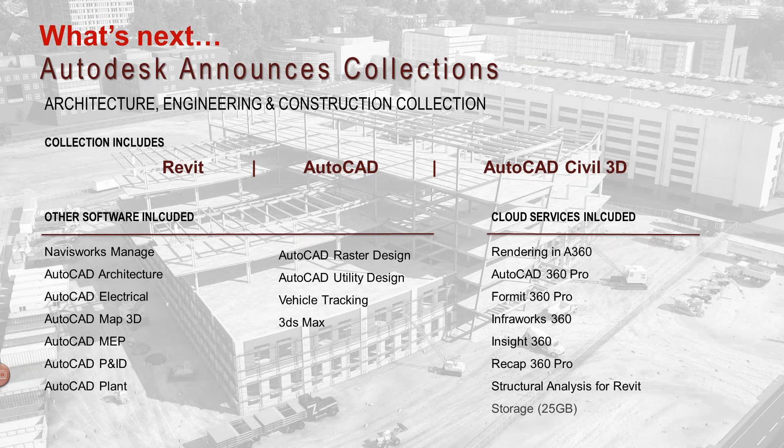Now let's go ahead and get to what you guys are all here for. So what is new in Autodesk Revit 2017? As you guys can see, for each discipline, architecture, structural engineering, and mechanical, electrical, and plumbing, there has been quite a few features and enhancements that Autodesk has made with this new version of Revit. Some of the ones that we feel are the strongest, both Curt and myself, just based on previous conversations and interactions with our customers, is on the architectural side, there's depth cueing...

...global parameter enhancements, as well as a text editor and layout engine. I know that a lot of you that I see on this webinar have asked about a text editor, and know that that's been something that Autodesk has been missing for quite some time, and now they have come out with it for Revit 2017.

On the structural side, there's reinforcement connectors, structural connectivity, and steel connections for Revit. So quite a few good things that they've come out with on the structural side.

And then on the MEP side, there's design to fabrication, hanger improvements, and creating an MEP model within Revit with fabrication components. So Autodesk has really made an effort to have the connectability between Revit and fabrication and increasing the workflow between those two.

It's really not supposed to be the building that is the focus of this construction document or this presentation. Instead, it's about the building in the foreground. We've gotten around it in a couple ways in the past by picking on elements and then telling that one element to be halftone in that view. I decided to throw in this slide right here because I think this tells the story even better.

Let me demonstrate that for you here. Let me flip over to the Revit 2017 screen. I know there's a little bit of a lag, so I'll try not to talk too far ahead of what's going on. So let's start in the plan view here.

It's this elevation marker right here. I'm going to pick on it, and you can see that the range of it goes back down here to the bottom part of my screen right here.

So one thing you'll want—I'll do just a little how-to on a couple of these demonstrations, but mostly I'll try to keep this high level. You can take a class from me later and I'll teach you how to do these things myself. But the far clipping, instead of no clip, that's not going to work with depth cueing—clip with line or without line is what we're looking for there.

And I get two sliders that I'm going to use here in a minute that run from here down to here. So for example, if you look in this area right here, from the top to the bottom down here might be considered 100%. So right about here might be 15%. If I move one of the sliders to 15%, it's going to start cutting into the building in front of me. If I pick another vantage point about here, these walls start to fade away differently than the wall here in front that I'm seeing from this angle. This is about maybe 60% across my screen. Somewhere in there you'll start to see the hazing.

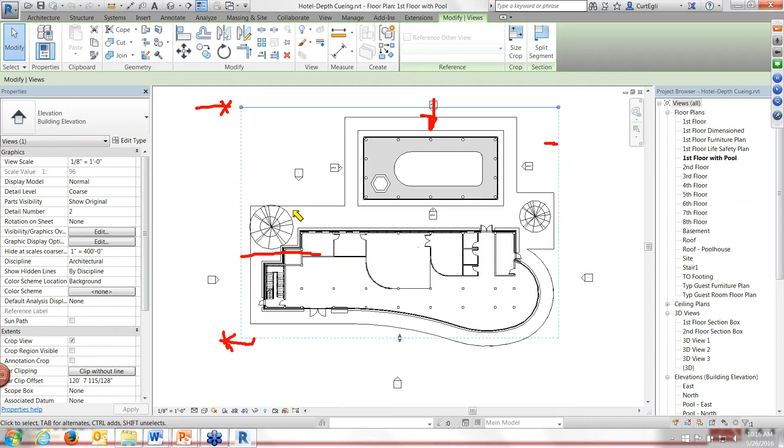Okay, that will happen. So let me go give that a try then. I'm going to go to that north elevation view, and I'm looking at the pool here in the foreground. The pool building is supposed to be the item of interest as I'm looking at that, and I'm trying to get the hotel to go to the background here. So what I've done in the past probably is pick on this and say I'd like to override the graphics of these elements and tell it to be half-toned, something like that.

The depth cueing will help us with this. So the new buttons that you're going to find in Revit are down here under graphic display options, and shadows will work really well with this too. If you turn on shadows, you're going to see some of the depth cueing happen with shadows as well. Here's the new area for depth cueing. It works in section and elevation. It doesn't work in a plan—that doesn't even make sense there, right? But it does in this sort of view.

For MEP and structure, I was saying earlier that we have some automated behavior out of our templates that we use there. Shift your view over to coordination or architectural in nature, and then this button will work for you in that view as well if you'd like to have pipe and duct in the foreground, or structure, that sort of thing, and have something else haze like what we're going to do here.

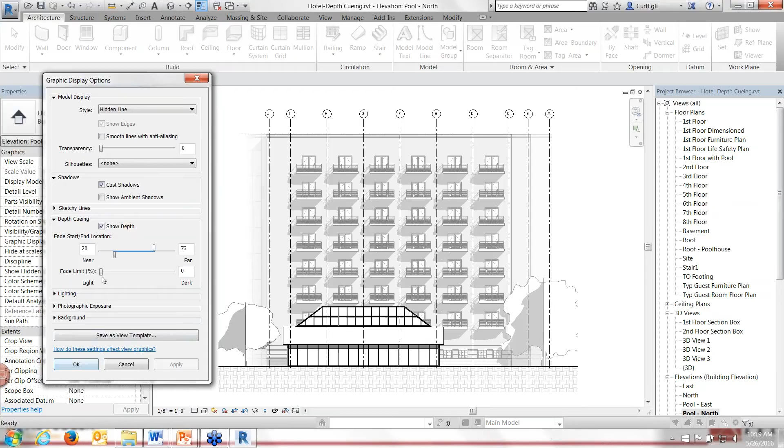I'll hit apply. And then for the fade limit, maybe I up that just a little bit—when it finally hits its limit and starts to fade out, how light or dark do I want that to be? So if I set it up too far, it gets dark. If I set it up at this end, it'll stay a little bit lighter.

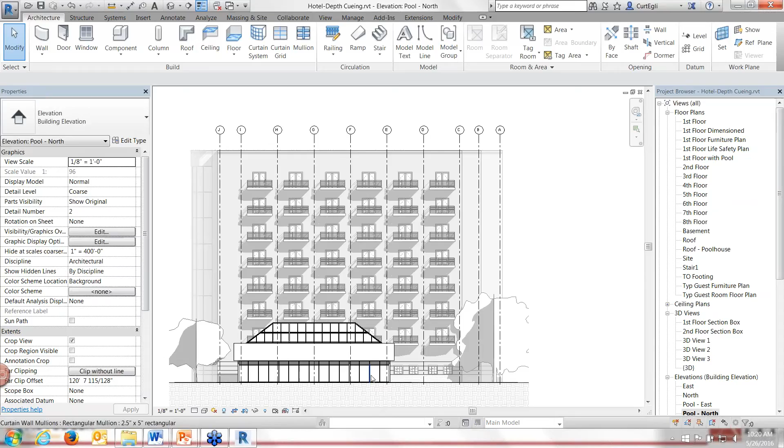And what I'm heading for here is, you can see right away that the building in the foreground is jumping right out at us. In the more subtle ones, like up here, you should be able to see that on your screen—this surface looks a little farther back than this one, which looks a little farther back than that one. So I can adjust that with those sliders.

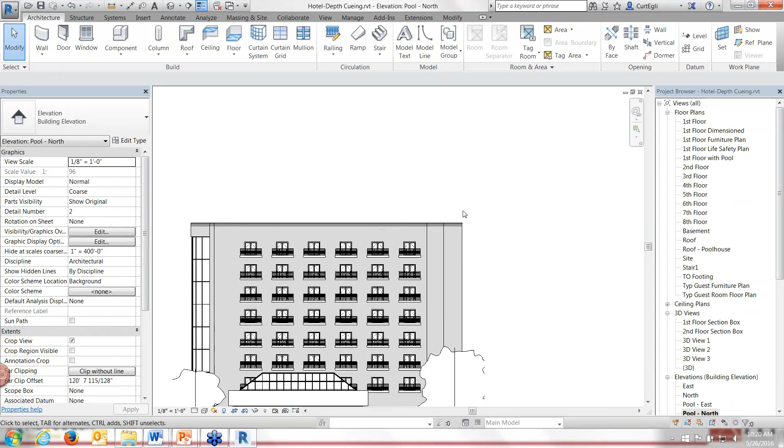You will note, though, that the annotative objects such as the grid here are not affected by depth cueing, so they will stay bold—which is perhaps what you want in a construction document. But I typed in VH to hide that category, so it's that sort of thing you may just want to shut off if that's what you're after. Okay, so anyway, that's depth cueing.

Let me go back to my slides.

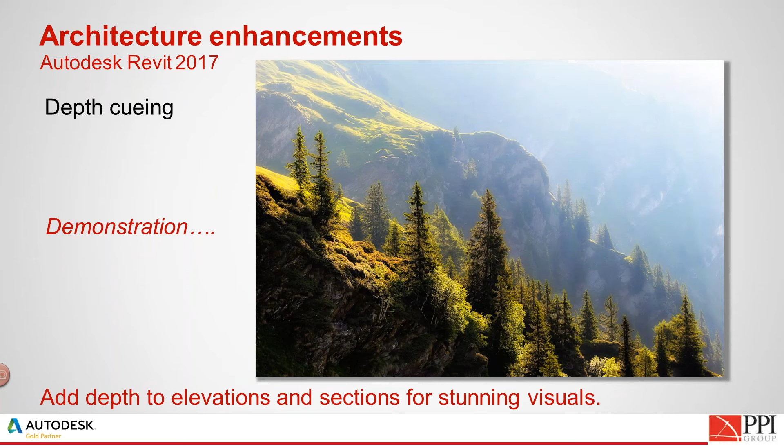I double-checked this because I was kind of hoping it was a misprint. I know this is important with walls, roofs, and floors - it'll make it easier with things throughout the building. I was kind of hoping they would include topo surfaces in this as well.

With some of my outside applications, I'll want to have a fence or railing follow up the hill, and it still does not do that. I would either place a shaped wall underneath it and have that slightly hidden under the surface, or - somebody on the internet was showing a really great application in Dynamo to get that part done.

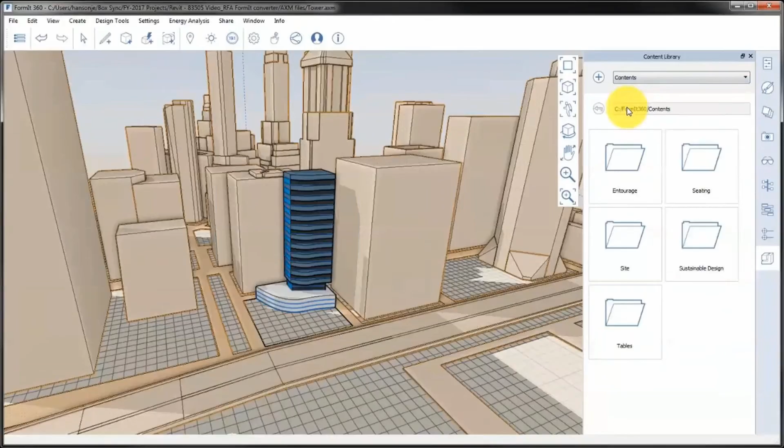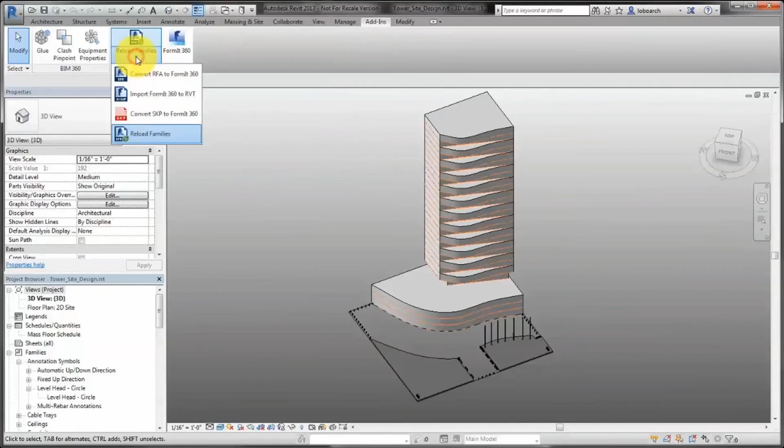FormIt is for conceptual modeling. FormIt 360 is a service - it's not included with Revit. They've bridged the gap between the two, so that this architectural modeling software where you'd sketch and collaborate and revise early design concepts - the converter will let you take Revit RFAs, a short list of RFAs, and bring them into FormIt. Then if you've changed things, you can replace all and override as you're bringing them back in.

The categories that can be transferred back and forth - if this goes too fast, you can look it up on the internet later - but it's casework, entourage, furniture, furniture systems, parking, site, mass, which would be a good one, generic models, that's pretty broad so that could be across disciplines, and specialty equipment. So it's a little bit of an odd list of what they concentrated on for the conversion, but not too odd.

When you think about what you might be using FormIt for in a conceptual model, those kinds of categories like entourage, parking, site, and so on are all things you probably would want to include, and now you don't have to remodel them to get them in there.

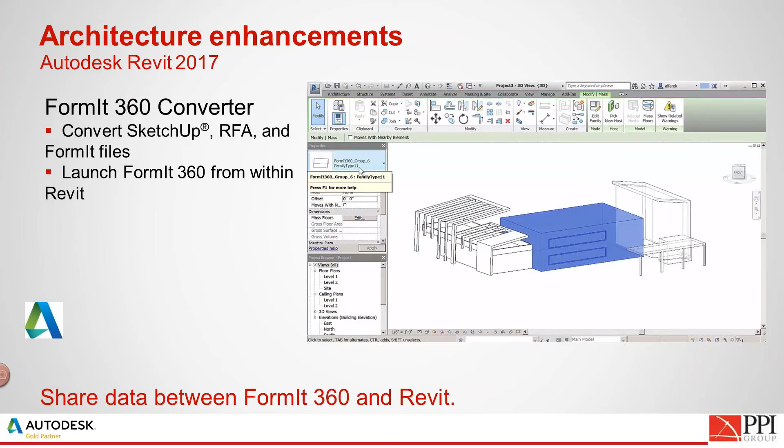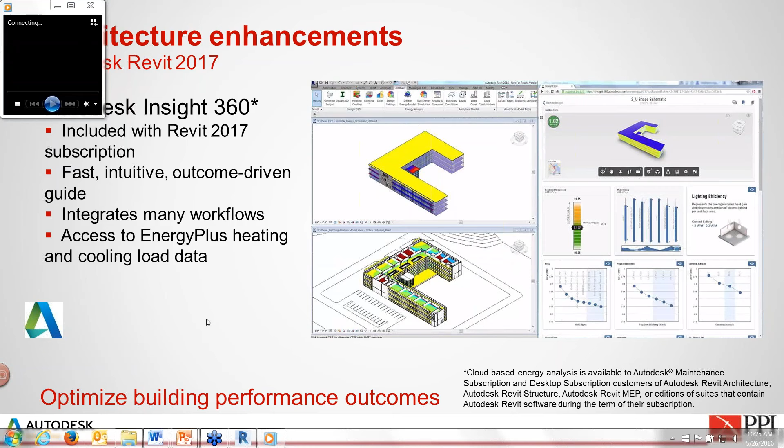Another one included in this presentation that revolves around cloud services as well is Autodesk Insight 360. This is one where you're using your Revit model and then looking for a guide basically on how you can change your building in order to make it perform better. I included a video on that one as well so we can make some fast rounds on it - an outcome-driven guide to building energy and environment performance.

You'll pick your geographic location, so you're at least going to want to do that, obviously. And then Revit has an automatic energy analytical model that we'll use to enable Insight 360 to be able to give us results back like this.

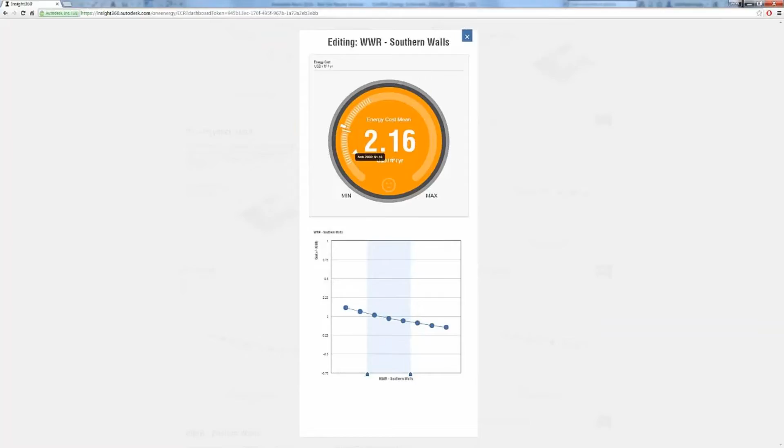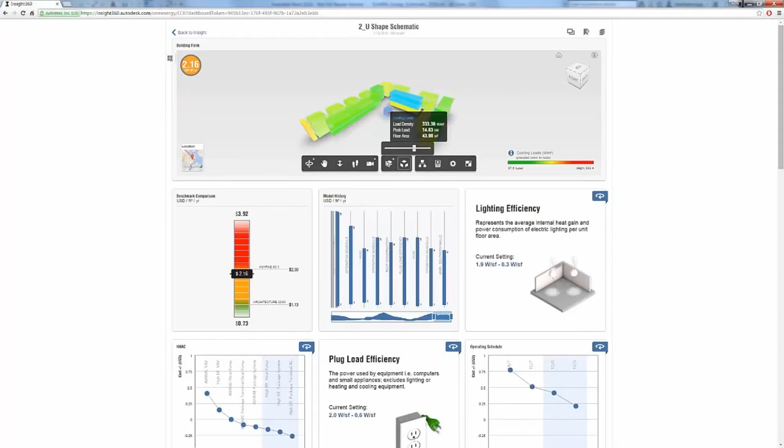So we look at a range of potential design outcomes. They have an energy cost range factor built into this to identify key energy performance drivers and compare different design scenarios. So that's a lot of what this is about, trying to make that better performing building.

It integrates a variety of simulation engines and workflows, such as Revit energy analysis, which you're maybe familiar with, and lighting analysis as well. There's access to EnergyPlus heating and cooling load data, and that's also included in Insight 360. So once again, it's to provide a guide so that you can make better decisions with regard to building energy and environmental performance.

So another one that is going to be across multiple disciplines as well here is global parameters. And I thought I would demonstrate that one for you as well.

We can associate global parameters with type properties for an element, and with instance or type project parameters as well. Another way you can use this, keep in mind, is you can filter a schedule by global parameters if you so desire, to look for ones that are missing an association, for example. Also, you can transfer those global parameters between projects.

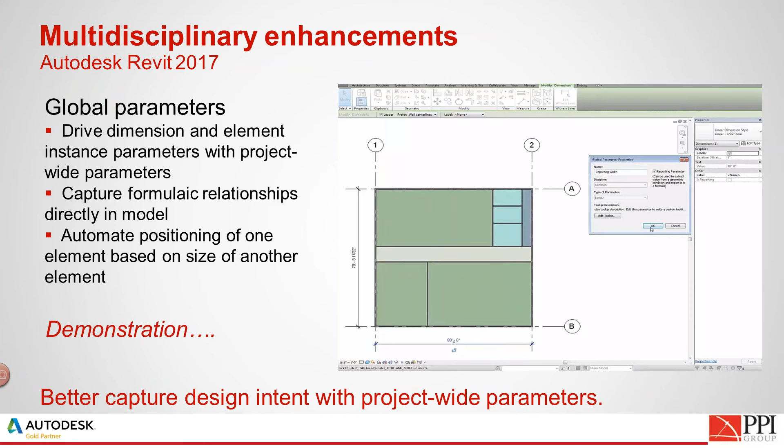So let me go ahead and give this a shot for you. Let me close out of this project and open up a different one. Let's go to this one here.

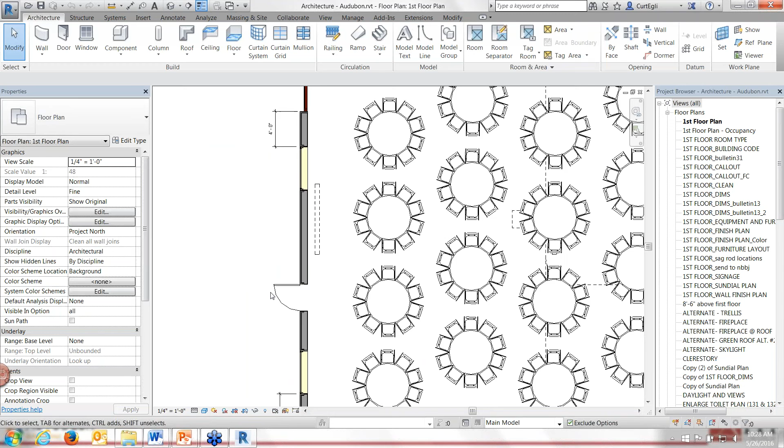So I have a global parameter that's already set up in this one that I thought would be a good example. Down here at this end of the building, I've got two different windows set up. This one is 4 foot off of the edge of the building, and this one at the moment is some odd distance. So if I select this window and say I want it to be 5 foot, that's just a plain dimension I had driven on that one.

Up here at this end, if you look at what I had done, when I select on it you'll see a little pencil that shows up next to it, showing there's a global parameter that's been placed on it. And if you look up here at the top, you'll see the window distance has been defined.

And so the way that you set up global parameters, maybe I'll just draw a couple of walls out here. Say that I draw a wall here to here, and another wall from here to here, and another wall from there to there. I'm just drawing a few here.

The way that you set up a global parameter, it's this new button that showed up in 2016 R2, about midstream. I can say that I want to create a new one called, here that's new, this is new. I'm going to call this one L, for example. And I'm going to create another one called L2.

But this time, instead of just setting these dimensions like you saw the 4 foot revolve back down to this, you can set up formulas around these as well. So for example, if I wanted L to be L2 divided by 2, always half that distance: if this one is 8 foot, that one automatically shifts to 4. If this one is 10 foot, that one automatically shifts to 5.

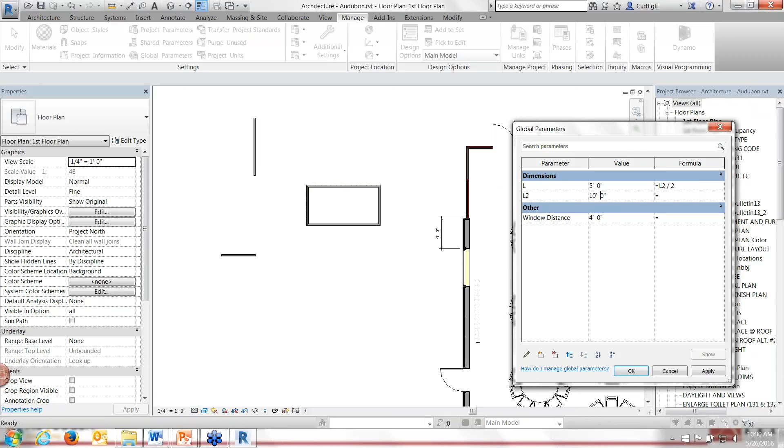And so if I assign those, for example, where I say... so if I put it here, okay, so here we go. Say that I put a dimension on this side and a dimension on this side. I'm just making permanent dimensions out here. Maybe I'll do it this way for you. This will go fast. So here's some dimensions.

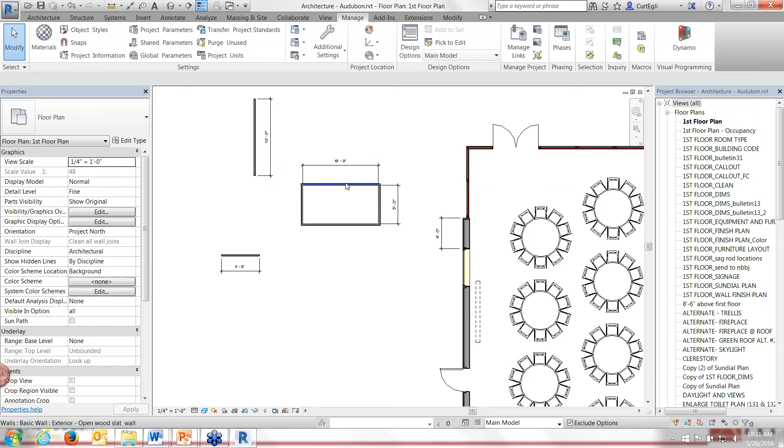I select on one of these and say, you know what, I'd like you to be L2, and it goes to 10 foot. This one, I'd like you to have a global parameter on you called L, and it goes to 5 foot. And then in a totally different part of the building, I say you be L2, and you down here be L.

Now at any point, if I say, let me get in a little closer so you can see this better, if I say I really would like you to be 8 foot—now watch what happens: this one becomes 8, that one will be 8, this will be 4, this will be 4. And I say okay, everything shifts. So the way that can work, there's just so many different uses for this. I'm going to do the same thing with this window.

If I want to keep these two windows equidistant from the edge of the building, I select on this one and assign that to the window distance parameter that I had created. Now it's 4 foot, right? I'll edit that and make it 6 feet and apply it. So say it's a multi-story building like a hotel, and those windows on the outside edges always stay equidistant. Pretty cool, huh? Very cool. Well, thank you, Wendy.

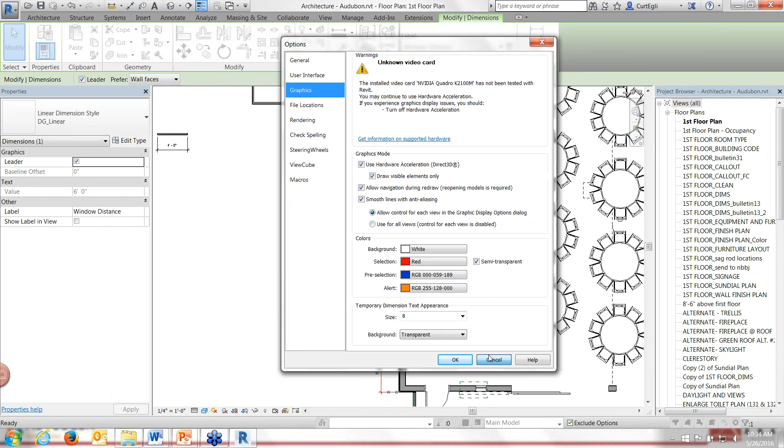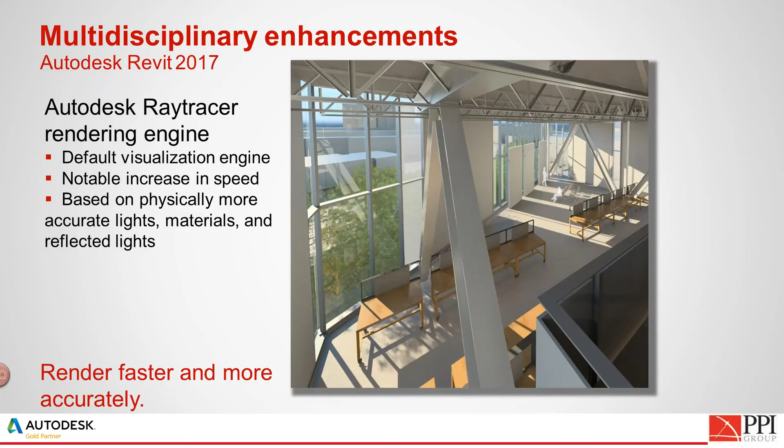Okay, let's come back to this again. Another one, I won't take the time to do a full rendering, but for those of you that want the marketing material or photorealistic renderings, Autodesk now has the default visualization engine in Revit as the Autodesk Raytracer. Two aspects are going to be picked up: there's a notable speed increase that will improve performance, and physically based rendering results are going to be more accurate - we're talking about reflections and subtle lighting enhancements.

Let me show you a little bit about the text editor here. Maybe this is another thing that affects everybody - you've been waiting around for this a while. Let me demonstrate this for you. I'll close this out, and let me open up this one.

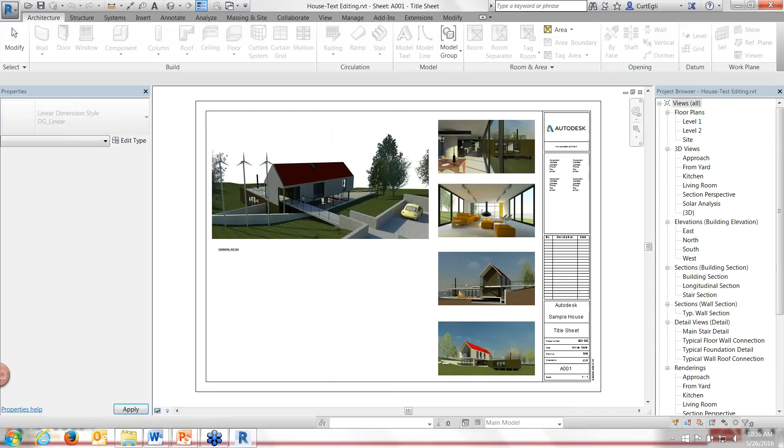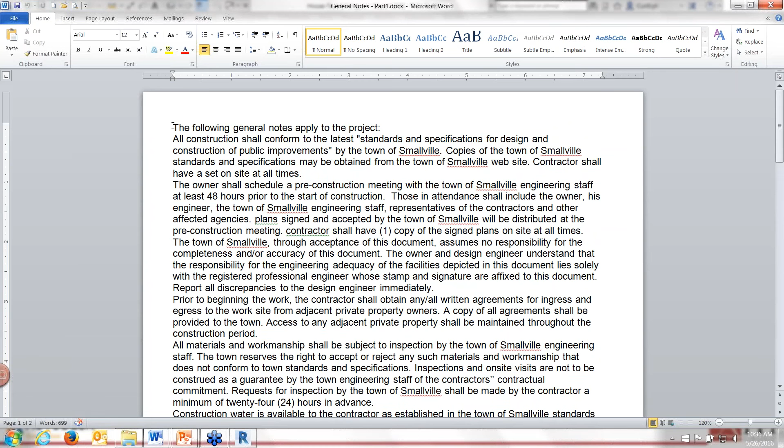Without watching me do a ton of typing, let me take a Word document I have, General Notes Part 1, so I want to have this text here. I'll do a copy on that and then paste it into Revit. I start up Annotate, go to Text, that's a good size, say I want it here-ish, and then do a paste. Okay, so now I've got a bunch of text in my session.

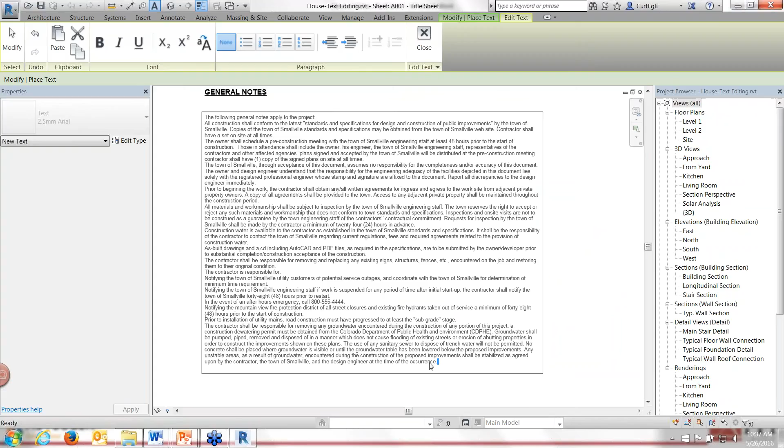The controls are very similar to what you have now in the text editor, so you can resize it like you're seeing here. But if you click on it once more, you'll see the new capability kick in. It gets darker instead of blue, and I can say up to here I'd like to have it a numbered list, right? The way this works with the soft returns - do you see how this is numbered down? I'm going to be using Shift Enter here on the ends of these. Let's do this one too. Give me a second on this.

Shift Enter, Shift Enter. Where's the end of my sentence? There, Shift Enter.

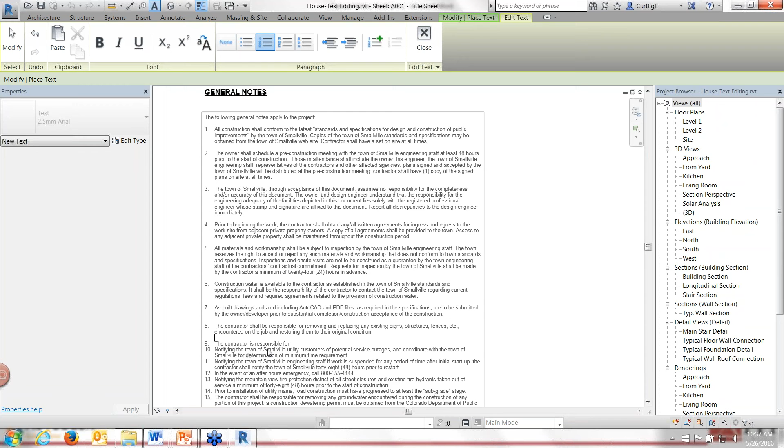Okay, now right in here, for example, I'm saying, ooh, you know what? I'd actually like these to be sub-bullets. So let me highlight from these and indent those, and it becomes A, B, C, D, E, kind of a thing. Nice, huh? So Shift Enter there, that sort of thing.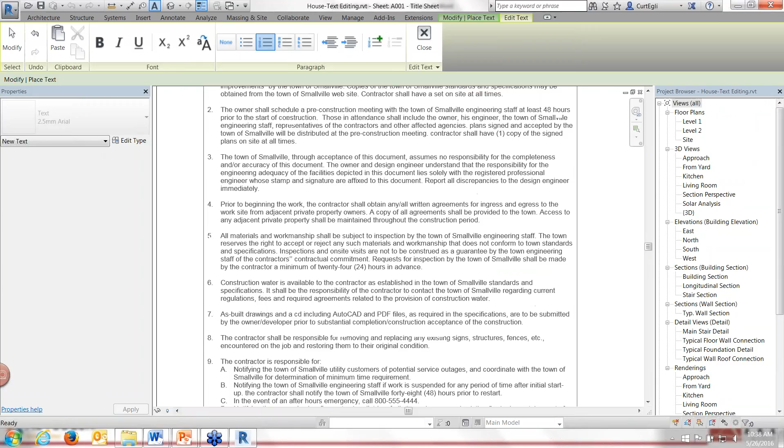And then I guess as you'd expect, at least would figure that they'd put bold in there, for example, like that.

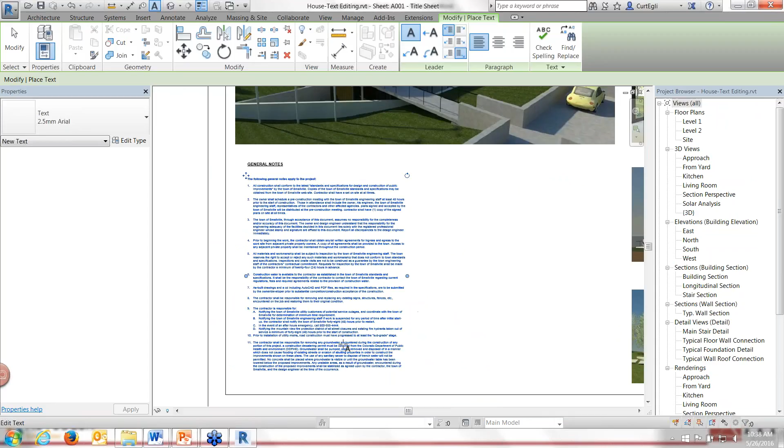Okay, so say that there's another circumstance. Well, let's finish this off too. It's mixed case right now. Let's shift this over to uppercase. Yeah, so you can shift it back and forth between the two with this button right there.

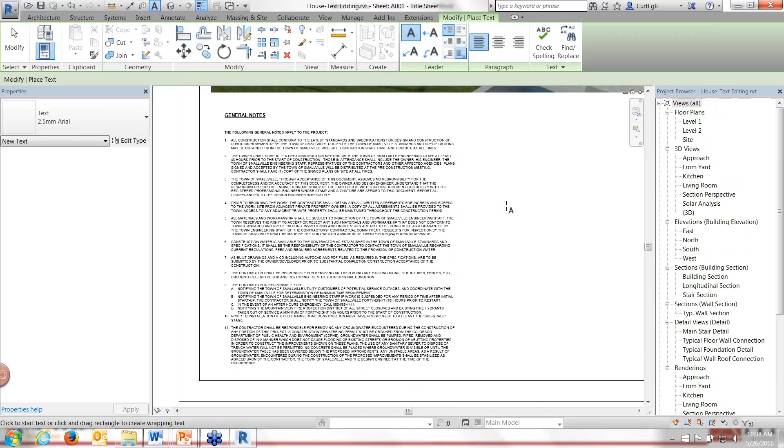Nice. Okay, so to kind of complete this part out, over here in this area, let me resize that just a bit. I have even more notes I wanted to put on here, but I'm going to want another one over here that starts with 12. So I'm going to come to a second document of general notes.

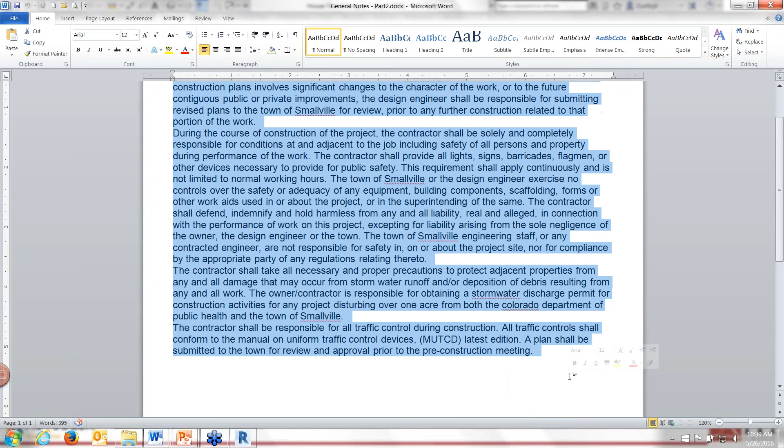So I'm going to take this from here to here and copy, and then I'll start up my text again here in line with that. Let's do it about here-ish, and paste, and highlight, and say I want to number it.

Wow, that got really long. I should have done a box. Here, I'll get it out here. Come on in. All right, there we go.

Now that one starts out as 1, so I click, whoops, cancel. Click on it once again, click again.

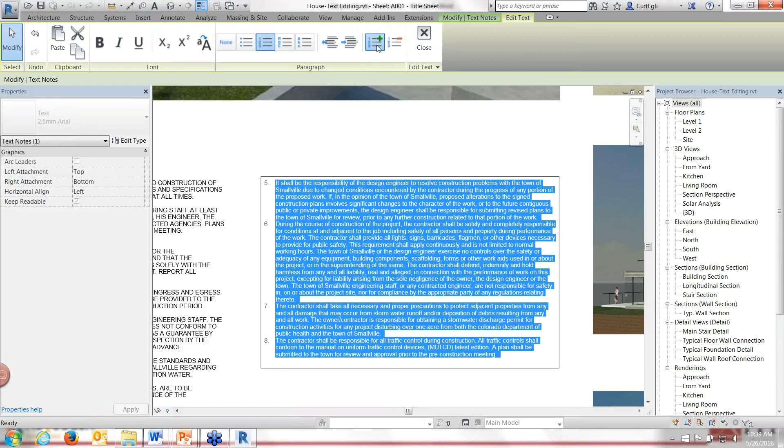That starts out with a 1, so I'm going to say that I'd actually like this to increment up to 12. So I'm just hitting this button up at the top to increment it up to 12. And then you do the soft returns, and maybe I'll just do this before leaving it. Change it to uppercase as well. Okay, that's the new text improvements in here as well.

So keeping my eye on the time, let's go back to the slides.

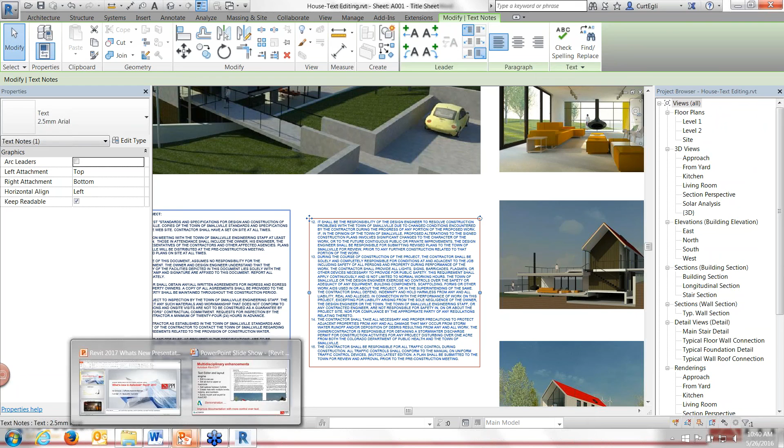So schedule improvements, a couple different things here. They now have included view templates as a part of this for multidisciplinary enhancement. This way, if you have multiple schedules, you can keep them all looking uniform.

So I use that. There's calculations with annotation tags. I think what I'll do is I'm going to set this one to the side because it takes me a few minutes to do this, and I'll come back to it if I have time. I want to make sure I don't shortchange some of the others.

Two different things going on here. A tag can now use a calculated value. If I get time, I'll show you how I can have it look at a parameter, a value, like how many students is allowed within that room, or should be allowed within that room. And then as the square footage on the room changes, the tag will keep changing with 23 students, and so forth.

And the other thing that maybe is an irritant that you're going to probably appreciate with tags is that now you can pin them. So you can pin them so that if, say, you're doing a door tag with a leader off of it, the door moves, but the tag will stay in place and the leader will just shift with it. It's also been an irritant in the past when you would go to free-end and the tag would jump to some new location. It doesn't do that anymore.

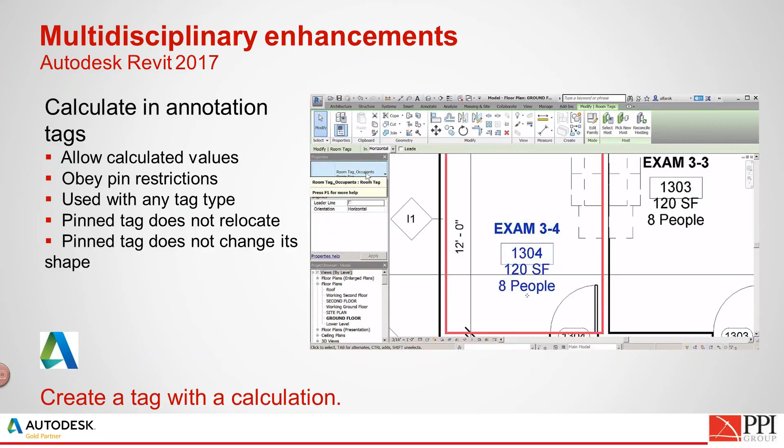Dynamo is now integrated into Revit. Before it was an add-on. Now when you do the install, you'll see the Dynamo button is built right in.

The idea behind this is to give access to non-programmers and programmers, to be able to use nodes that somebody else had created and make it do magical stuff for you. It's pretty interesting if you haven't used it before. I did that in a different presentation a little while ago, so I won't do that.

Tangency locks, what we're talking about there, I'll play a short video on that one.

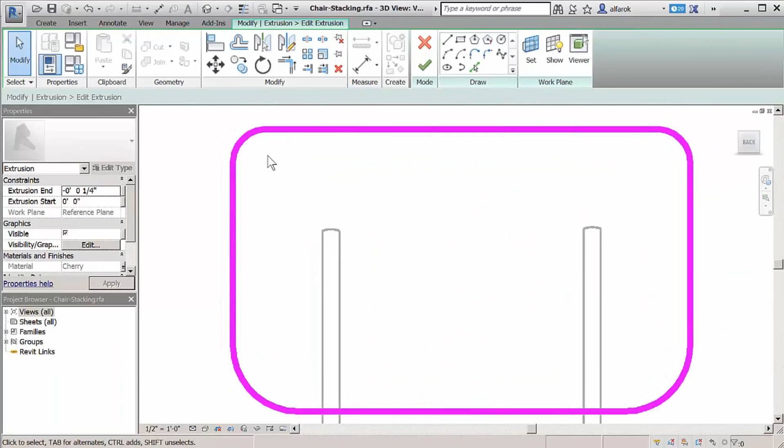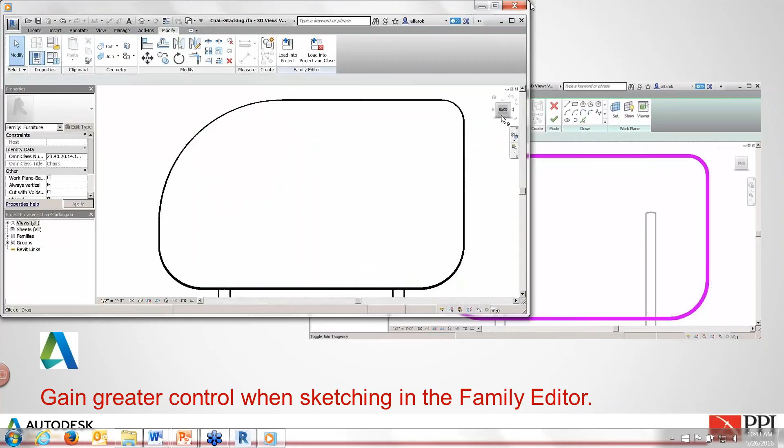For example, this could be on a floor or a roof when you're editing like that. The example shown here is in the family editor with the back of this chair. You can lock the tangency between that arc and the other two lines associated with it. Then it just becomes like clay - as you move it around, it flexes while keeping that association. So that's what we're looking for there, and that could be across all disciplines as well.

For structural engineers, let me drill down a little bit into a discipline here. The connectors we're talking about, in this case rebar connectors - let me go quickly to the video to show it as I talk through it so you can understand this better.

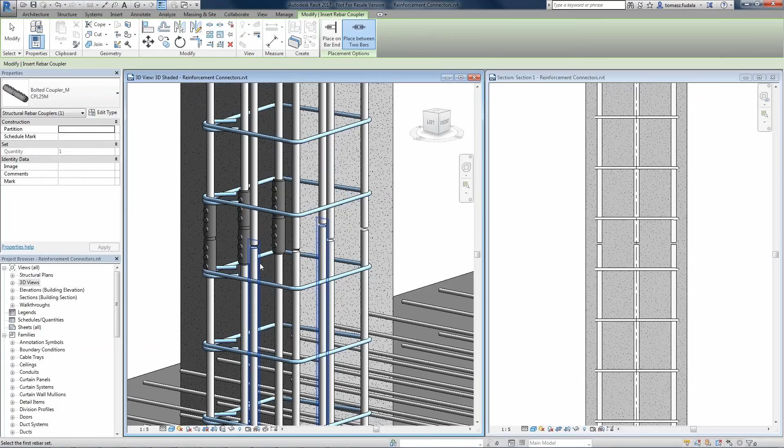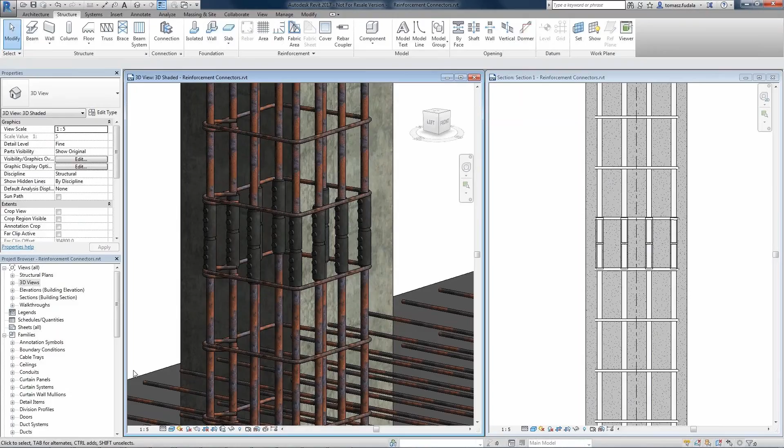Reinforcement connectors are family based, not a system family - these are fully customizable. They interact with the rebar they're connected to, so when you make a change, it helps facilitate that change management. Structural engineers use schematic connectors to define requirements, detailers use them for shop drawings, and manufacturers for full install. You can add the connectors to groups, assemblies and partitions with unique coupler numbering, and export them to various formats. This is an example of something that can improve the level of detail for reinforcement modeling and documentation, and I wanted to point that out because I think that's good stuff.

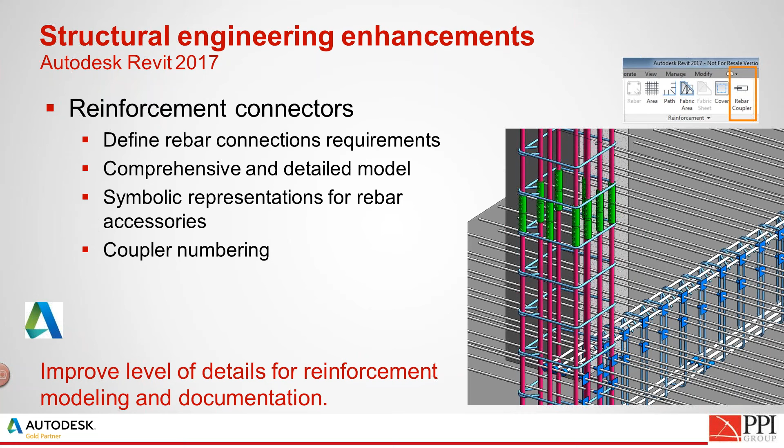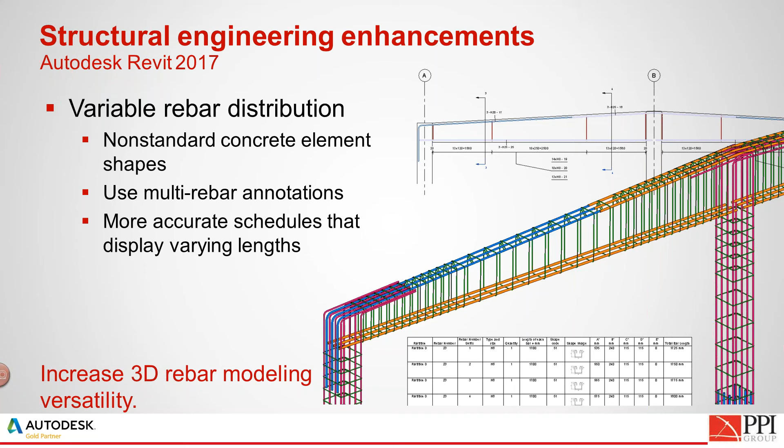Variable rebar distribution - what we're talking about is defining more accurate reinforcement for non-standard concrete element shapes. It'll fit the rebar for the non-standard geometry with rebar sets that vary along an inclined face, like what you're seeing right there. You can use multi-rebar annotations, customizable numbering settings, and consequently more accurate schedules that display those varying lengths. So versatility defines accurate reinforcement for non-standard shapes in concrete elements - I wanted to highlight that.

In terms of graphical rebar constraint management, they have new in-canvas tools that will replace the rebar constraints dialog box. I think you'll find that works better for your workflow. You'll be able to place the rebar more precisely with that constraints manager, and the rebar shapes snap to adjacent standard rebar and constrain them to host faces, which you'll find helpful on the placement of it as well.

So as you move and drag and copy the rebar around, the relationships are maintained.

Bent fabric sheet reinforcement - you can sketch the bent sheets to accommodate different shapes, the concrete hosts, like what we're seeing here in this slide. Later you can edit them if you have changes, so they can adjust to any changes. The idea behind this is to generate accurate and complete detailing and documentation of those structural elements.

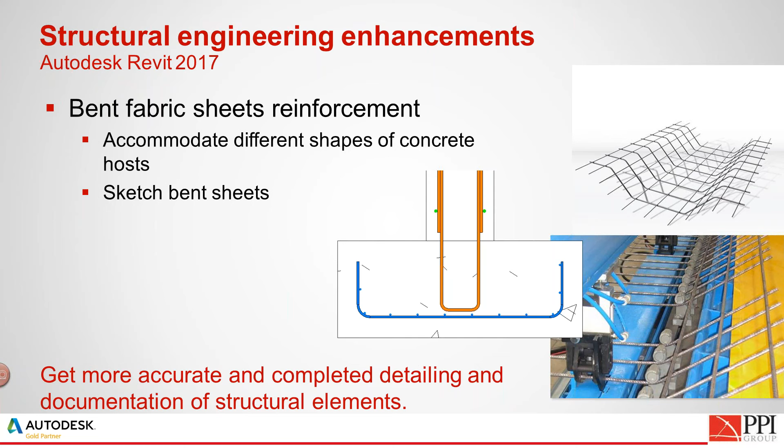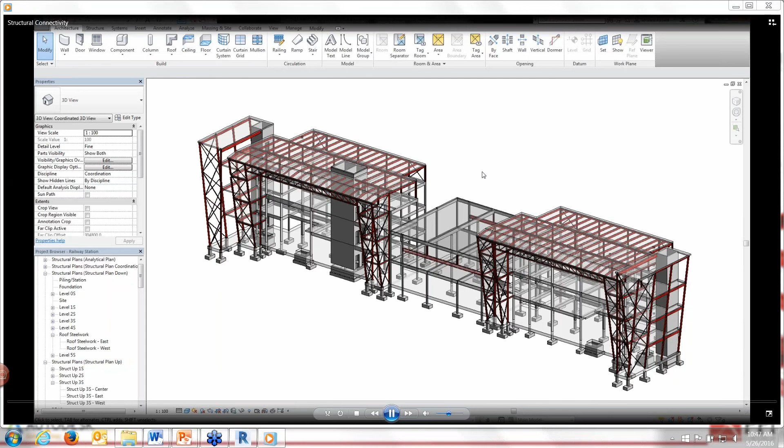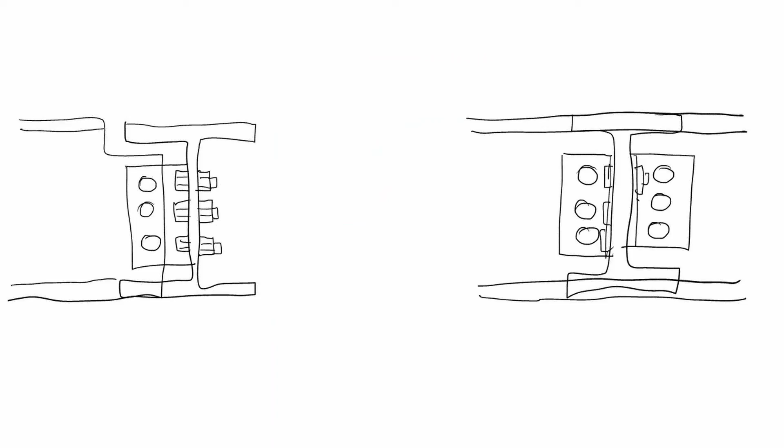It's trying to facilitate the discussions that happen between the engineer, the detailer, the fabricator when you're going from design to detailing on how to connect framing elements - beams, columns, bracings, that sort of thing. You can place this structural connection, new to 2017, and then define those relationships between the elements. There are several parameters which can be used in conjunction with schedules and tags, and you can also store pictures and link to further documentation about the connections. On the sheet, they'll show up using colors if you feel like using that to help note the status - like whether it hasn't been approved or doesn't need to go through the approval process yet in the workflow.

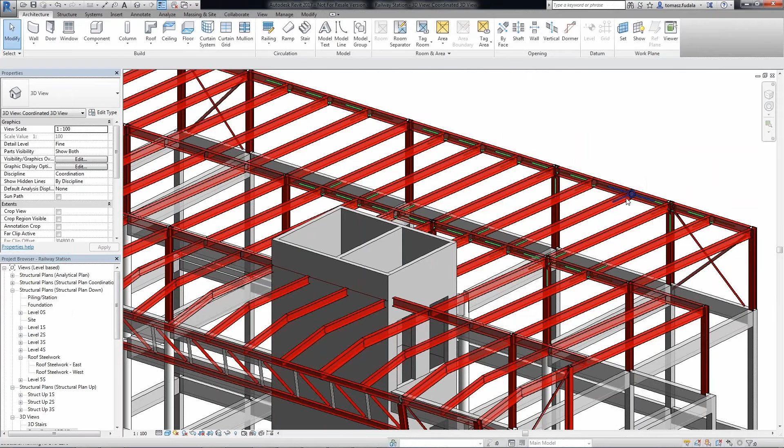If necessary and required, the connection between the framing elements can be extended into detailed steel connections. I'll be looking at that in just a moment because that's actually been a big improvement as well. So once again, there's the color coding I was talking about, and this is to help that workflow between design and detailing in the BIM environment.

So the steel connections that I was talking about, let me go to that slide. This is to help bridge the gap between Advance Steel and where Revit left off with steel connections, making more accurate models. Let me describe that a little bit. I'll bring up the video as I talk through it so we stay on track.

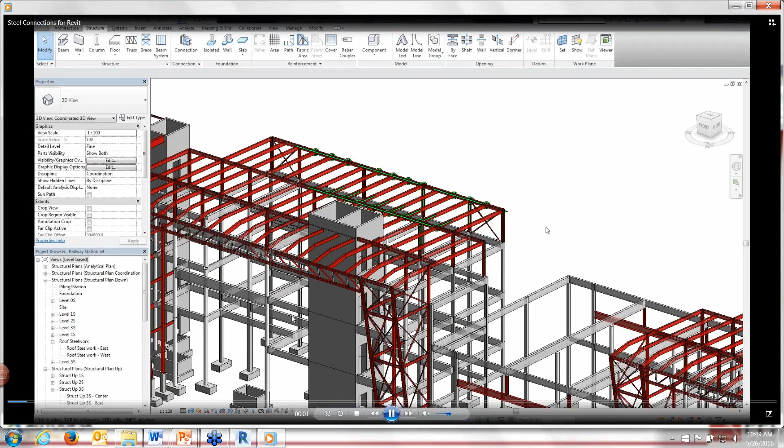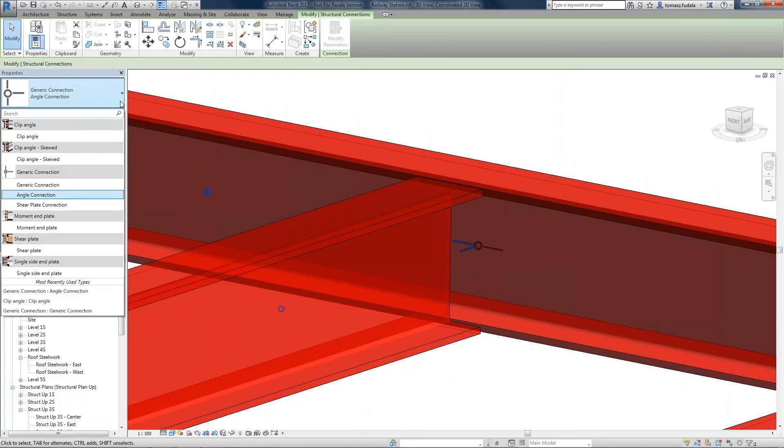With steel connections, you access a variety of parametric steel connections that enable connecting at a higher level of detail, like you're seeing here—higher LOD, right? It's an application built in a design engine based on US and European codes. The idea is to bridge between design and fabrication, and then synchronize between Revit and Advance Steel for detailing, if you go that direction.

Now, if you're not familiar with Advance Steel, that's a complementary product to Revit—it's not included with Revit. Structural engineers use it to accelerate the design, steel detailing, steel fabrication, and steel construction, and then extend that into fabrication. So that's what we're looking at there.

I felt like that one was pretty important. A couple more that I'd go over just briefly here.

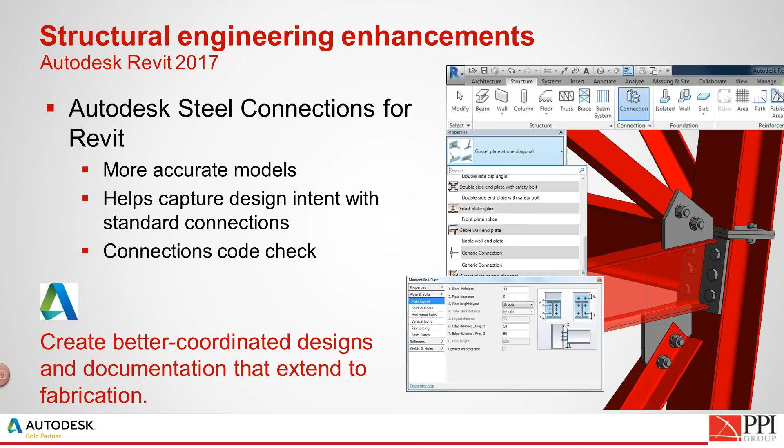Column split now allows you to split vertical columns at desired points and then place the connections within.

The steel profile catalogs are new and available across multiple geos. That extends the previous content offering so people don't have to seek alternative sources.

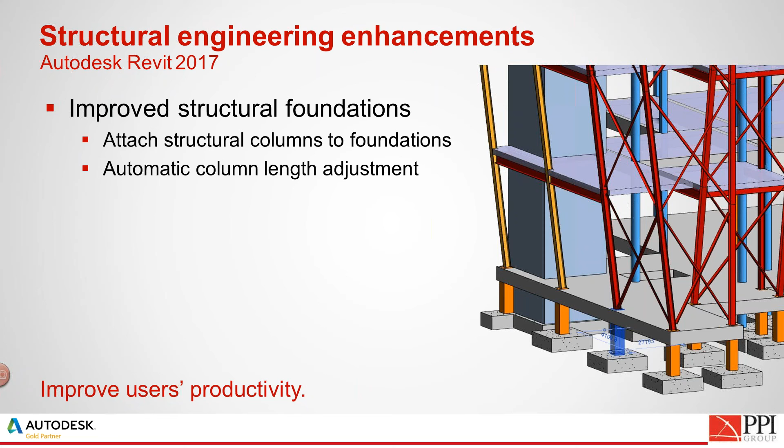Structural foundations and footings attached to structural columns so it doesn't have to go up and down with the level, but can go up and down with the adjustment in response to changes in the foundation itself. And then I wanted to move on to MEP design and fabrication here.

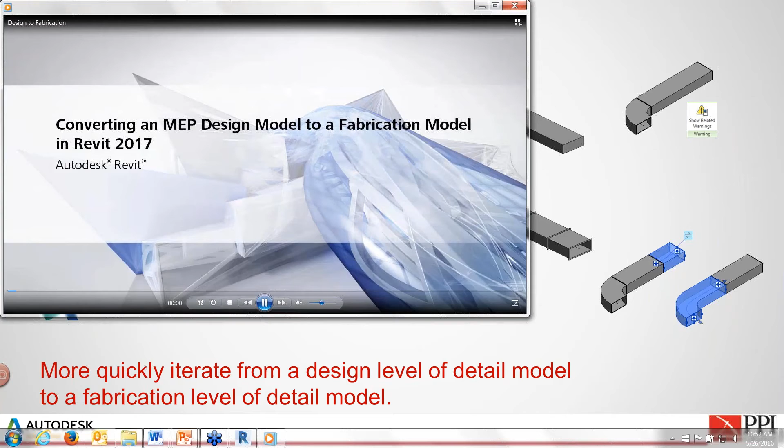So let me play a video that'll help you see that. I'm kind of excited about this one. This is the ability to convert a design level detail model into fabrication level detail elements.

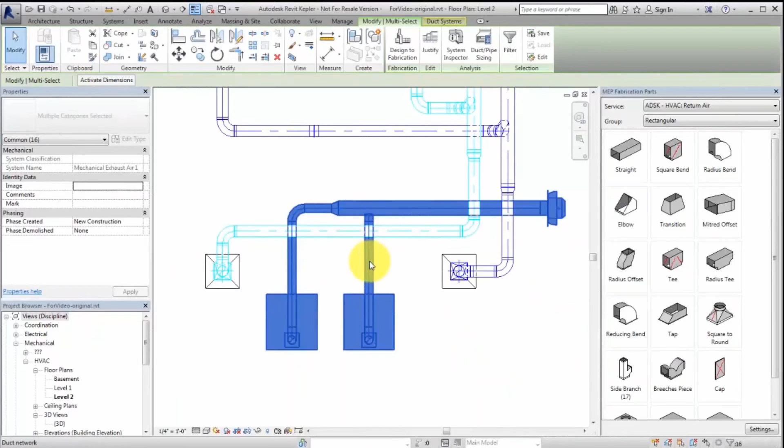When you're doing this, they've got the design to fabrication tool, and that will list the related services for duct and pipe elements. Those will be converted according to the rules defined in the fabrication services, and warnings will come up—like actually in this video, we use a chain and convert it over. I'm just tabbing through and then say now I want to convert that over. If anything breaks, you can see it brought up warnings here.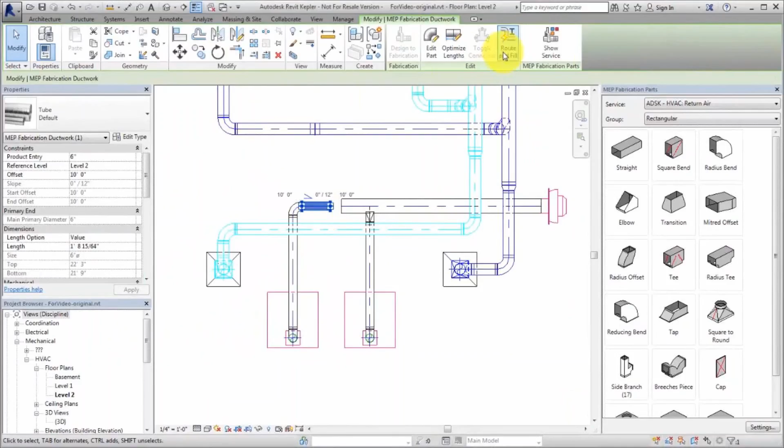Those warnings help you identify any kind of problems you have. Like in this case, there's a gap, and then you can fill in the gaps. If it identifies segments longer than their specified standard lengths, those warnings help you adjust those. If you find places where you need to fill in the gap, look off to the right—you see the blue dots over there. These are going through different solutions, saying would you like to use this combination instead of elements? It tries to help you through in that kind of quick iterative process.

So I'm pretty excited about that one. I've been waiting for that for some time, and I think it's finally come of age. I knew Autodesk was heading there.

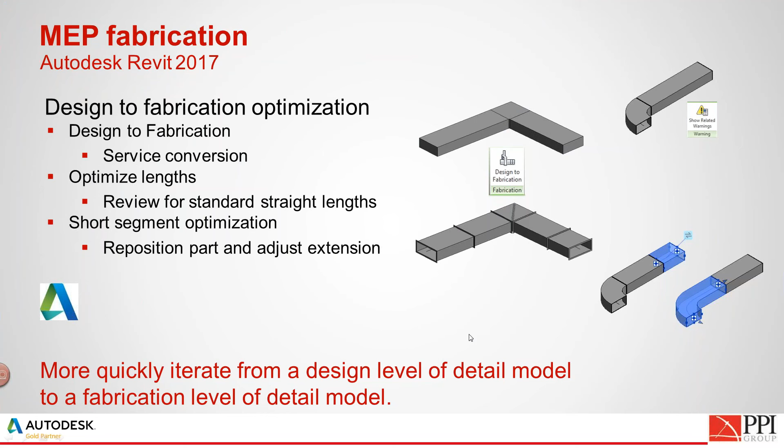I'll walk through three different slides here, and then I will play a video that goes with this as well, so you can see it in action. What we're looking at here are the route and fill tools.

Say that the first slide I did a moment ago was about converting design level into fabrication level components. Say that you want to do the modeling yourself at a fabrication level. With these services we're bringing up, you need to have one of the Autodesk fabrication products loaded, like Fabrication CADmep. Since it's a shared library, it should work for ESTmep, should work for CAMduct as well, but it's looking for those services and the components to go with it. So for this, we're looking at different solutions.

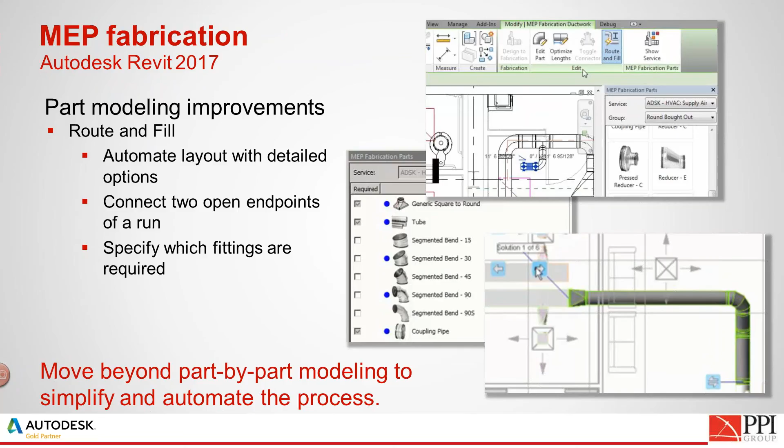There's those blue dots again, for example, where you get a level of control over the automation of layout that it's trying to give to us. If you need to cut in, they actually have that option as well, where we drop in a T, for example, between a longer length of duct.

For modeling improvements like this, there's a trim and extend tool, which works the way you'd expect it to, taking connectivity rules into account. What you're seeing in the lower right here is if you don't know the dimensions of the fitting, but just know you want a specific fitting for a particular scenario, you can stretch it up into place. So I think that's a good one too.

We have control over the slope controls to change the slope. There's a type selector to swap out fabrication elements for similar parts. And also they've added, out of the box, a variety of parameters into this for scheduling and tagging as well.

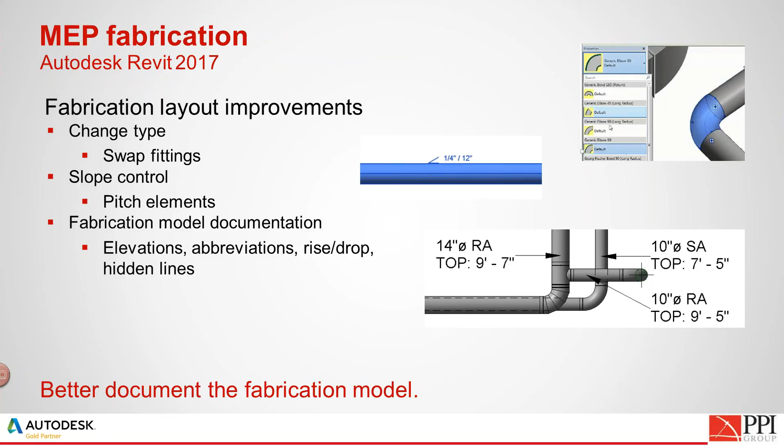With hangers, there's multi-tiered trapeze hangers now. You can adjust the rod position on the bearer to coordinate and avoid other services, for example. We can extend cantilevered elements, so you can extend the bearer on these hangers as well, and even place a hanger in free space.

So let me play a video for you here, and I'll walk you through it. This is about working at LOD 400 level.

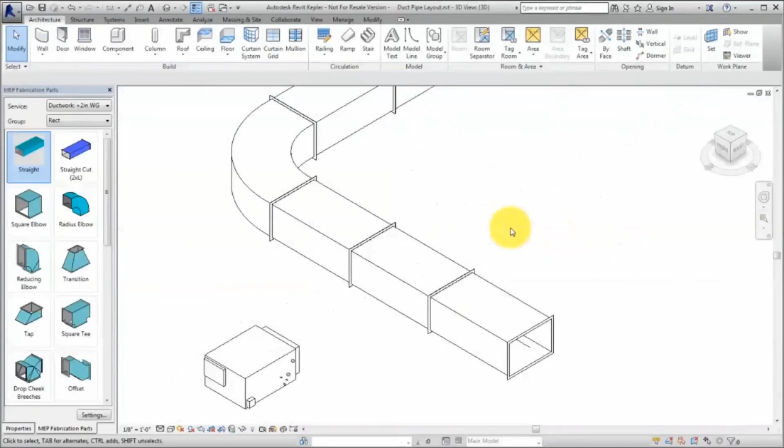So once again, we bring up model components out of the fabrication suite. If you hover over the top of the duct here, for example, you can rotate it around with the space bar. If I want to take a tap, for example, and put it on, I'd use shift and space bar to get that done.

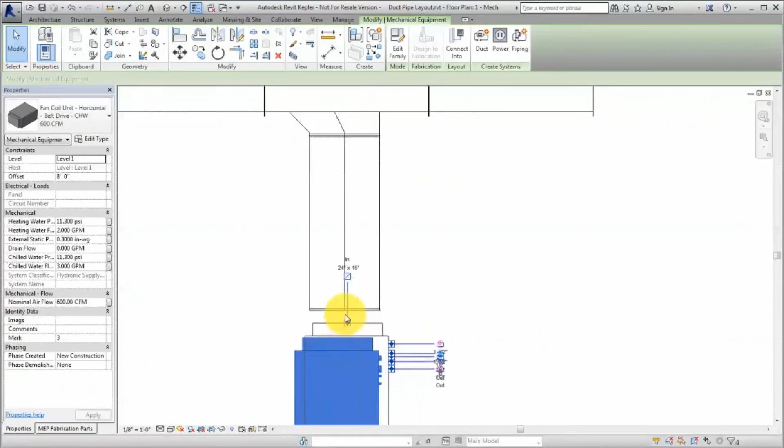If you're having trouble locking on, they actually have a smart snapping tool that'll increase the size of the snap so that it's easier to snap onto other objects. Ones that are part of the model already, like this fan coil I believe, you just slide it up into place and they'll snap up into each other there.

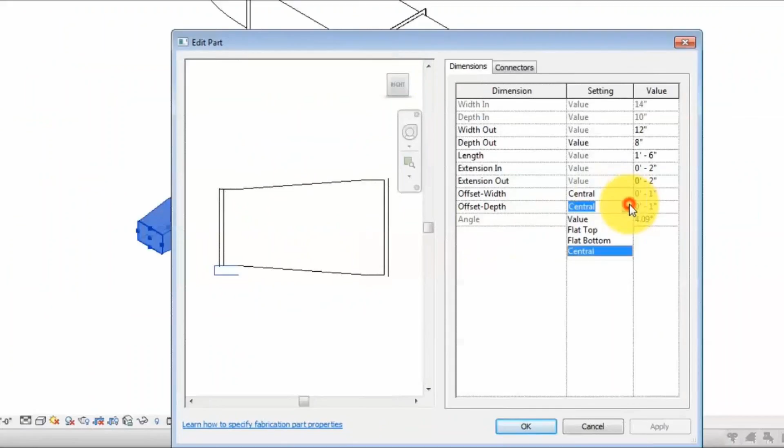And then placing a transition, like here for example, instead of opening that up in the family editor, they have this tool that'll give you quick feedback on its dimensions. So, for example, I want to have a flat top. When I hit apply, it goes to a flat top, and so on and so forth.

I can start to place straight segments off of that. So for mere mortals, that's the idea, without having to do a lot of family editing or just change a bunch of numbers. You get the visual feedback right away. And pipe works the same kind of way. I did want to highlight just a little bit on the pipe end of it.

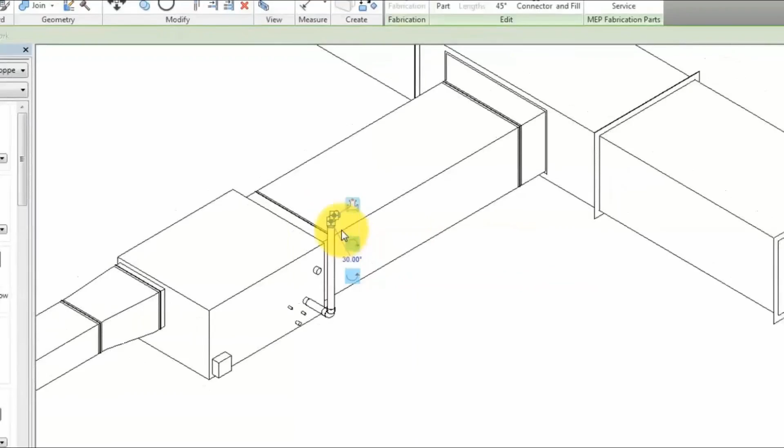For example, here, placing an elbow, I select on it and say that I'd like the rotation to be in 30-degree increments. So when I click on 30-degree, every time I click on it, it'll jump around to whatever I told it to be, and so on and so forth with the pipe.

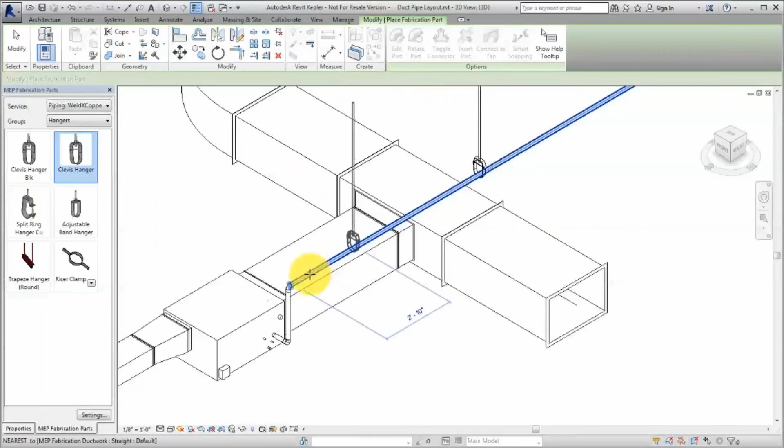And then lastly here, I wanted to show you some with hangers too. So on pipe hangers, for example, I'm placing one of those here, and maybe again down here. Same thing with duct hangers as well—you just select on a duct and say now jump over to that service instead. Now you get the duct hangers and place those. The way that works is with the hanger adjustments Autodesk gives you, it will adjust to the closest structural element.

So with the rod lengths that we're seeing, since there's no structural element, they're going to use the specified ITM file specification for that. But rod lengths, if it finds floors, roofs, structural framing, beams, trusses, stairs, and slabs, it will extend to those.

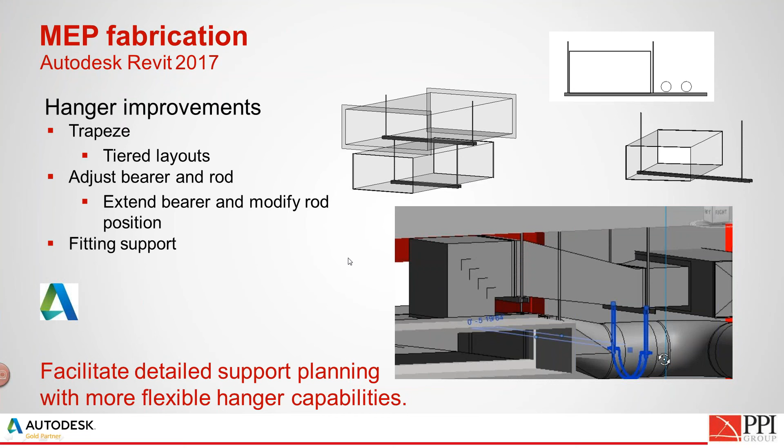Just a few more slides here that I wanted to point out with electrical, and I know we're running out of time, but hang with me for a few more minutes. For electrical, one of the things I wanted to highlight was apparent load calculation options, the temperature difference parameter type, and accounting for pressure drop at tap fittings, functionality for communicating that engineering data.

For calculating the electrical loads like these screen captures here, there's two different options. You can either sum it up by true load and reactive load, or the default method is sum the apparent load, which is a more simplified approach.

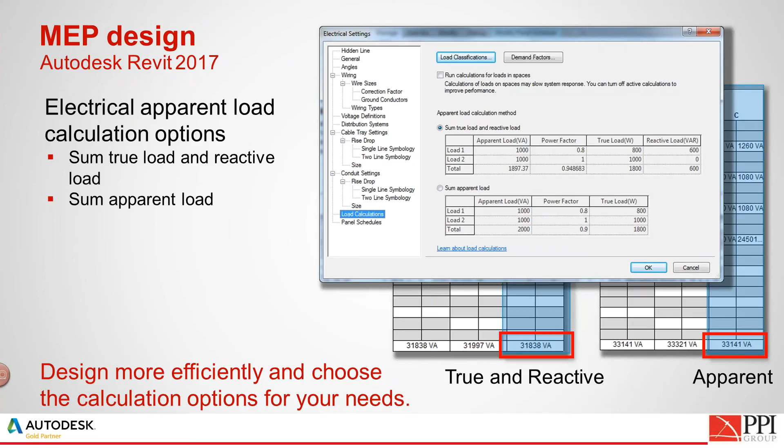They've included design computation improvements also in Revit 2017. There's a new temperature difference parameter type. You can now compute the delta T more easily using this new unit type parameter, and use that computed value in other computations as well, so you can pass that value off.

In order to get more accurate pressure drop calculations on duct networks, we can associate a pressure drop table with duct fitting taps. When you do this, Revit computes the pressure drop along the main and the branch at the tap fittings. You'll find that helpful as well.

One last slide I wanted to show before handing it back to Wendy and Ian is on scalability improvements. One thing we ran into was marks being generated automatically in an MEP model when people were working in a central model, with multiple people working on the same file at the same time, they'd get duplicate mark warnings all the time.

Autodesk has changed that, which will help performance, but be aware of this: it's no longer assigned automatically. I don't know, to me that's kind of good news, bad news, but it's definitely based on feedback from people getting slammed by that.

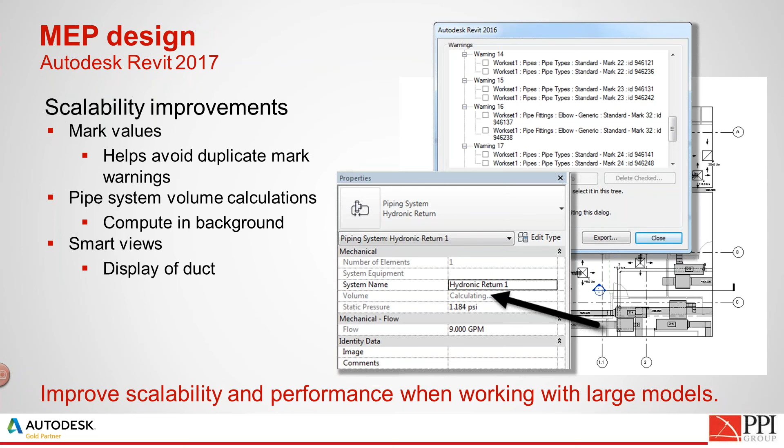And with that, I'll shift it back over to Wendy and team.